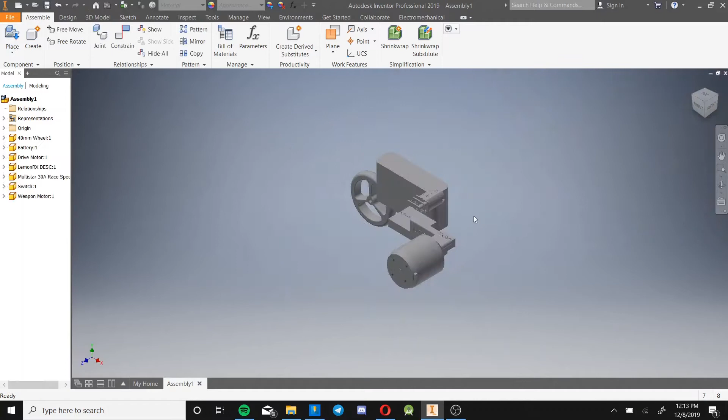Okay, so now that our standard components are placed, we can change our view to shaded with edges. Now, like I said before, you need to ground something, so I choose the battery.

And so here we can start putting in all of our parts, because this isn't all of them. We need 2 drive motors, we need 2 wheels, okay? So now let's lay things out very roughly.

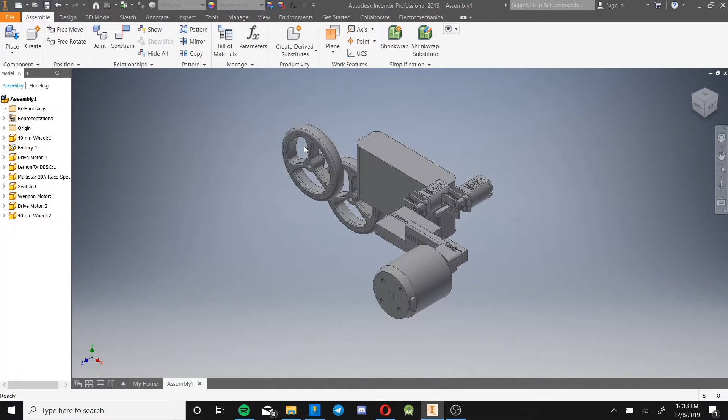And so if you notice, I can drag this around. Say I want it in the corner of that battery. Well, if I actually pan around, it's not in that corner of that battery. So that shows us that we need to do it on the planes. So if I want to make it in the corner of the battery, I have to do it from 2 views rather than from the 3D view. And so if I look, now it's actually in the corner of the battery.

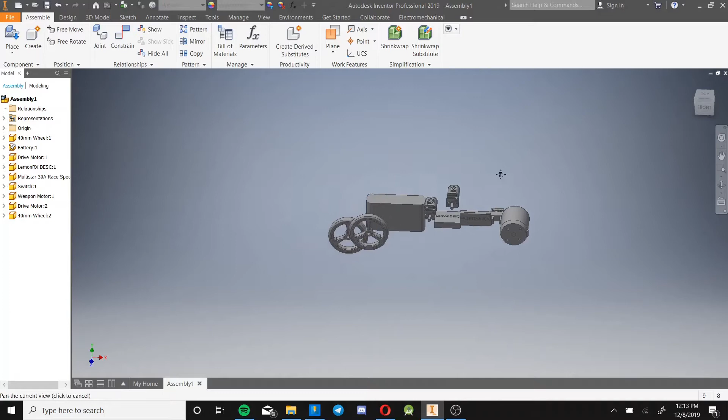So what we want to do is rotate things around. I just click this free rotate button up here, and I'm just going to kind of very roughly orient things. This just makes it easier to apply constraints.

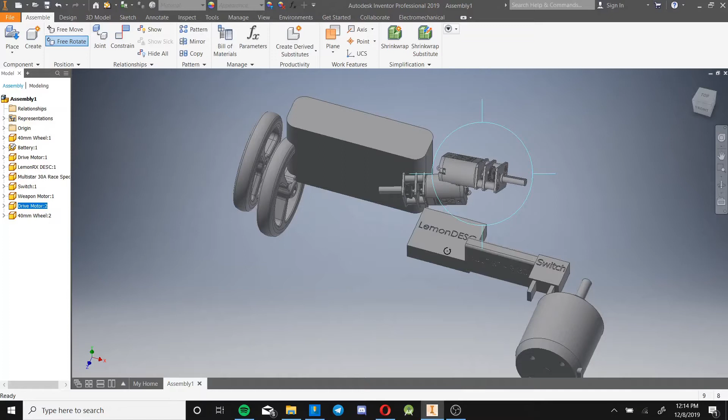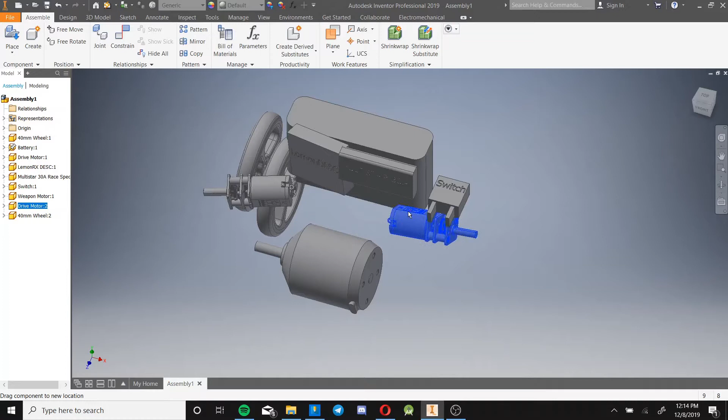And the orientation of everything that I chose here is just kind of going from wanting to package things as tightly as I can. So I want to make these electronics touch up right against the battery. I want to put the switch right in the corner there. I'm going to make the motors as close to those electronics as possible, so it's as tight and compact as can be in order to save space.

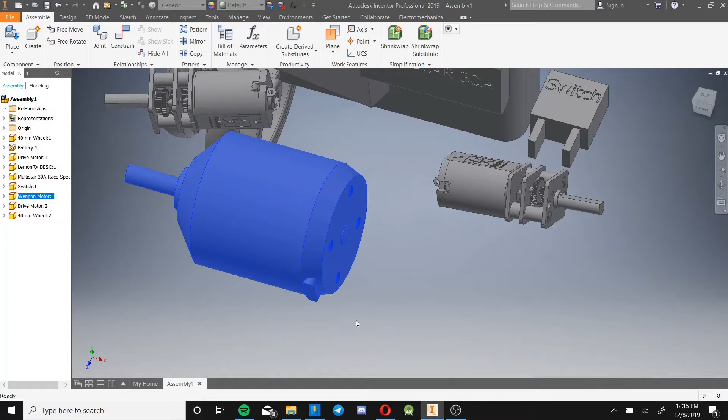And I know that I'm making a vertical spinner, so the weapon motor needs to be horizontal. Another thing to note is the wires here. See, right now they're pointing outwards, and so if we were to attach it like this, the wires would have to go out and then route back in. It's kind of annoying, so I'm just going to rotate this around as best as I can to get the wires towards the inside. And so now what we can do is lay things out more precisely.

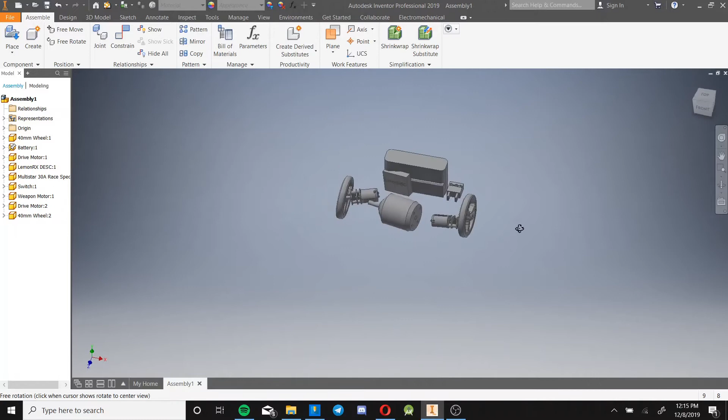Okay, that's pretty rough, but that's what our robot is going to be laid out like. So let's start applying constraints while still giving it some freedom to move.

So for example, these weapon motors or drive motors and the wheels, I know that it has to be on the same shaft, so I can do that with a mate constraint.

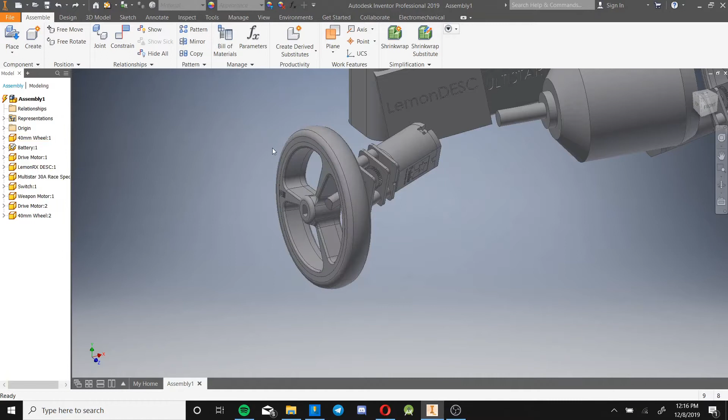If you ever have a wrong constraint, just undo it, or say you had a wrong constraint that you did previously before you did other constraints. What you can do is select the piece that you know to have the wrong constraint on, come over here, select the constraint, and delete it. So now it's free to move again and free to rotate. So let's continue.

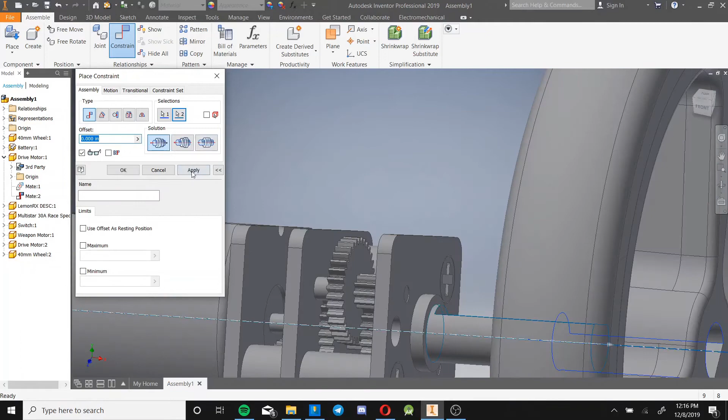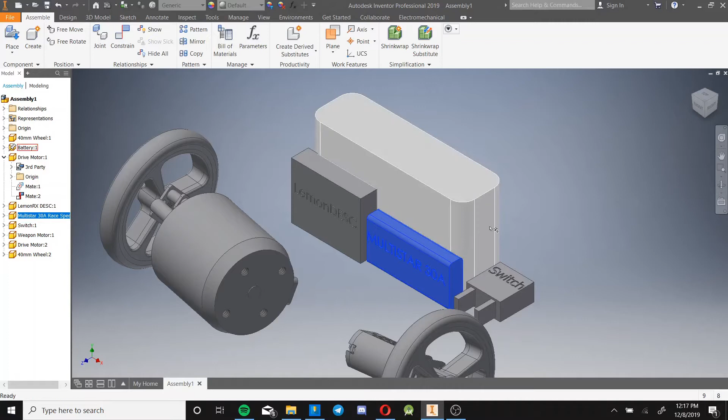Okay, let's take care of the electronics now and just kind of bunch them together. Okay, so this here is what we want eventually. We want things to be really tight, compact, not able to move at all, fully constrained. So let's do that for the rest of the components here.

And for the wheels, we know they should be in line with each other, right? And they should also be, the axes should be parallel. Oops, I don't know what happened there. The axes should be parallel to the battery itself.

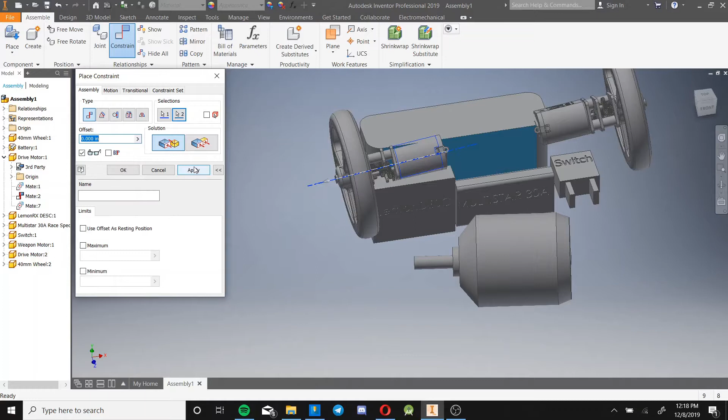And we can do an angle constraint on that, and just kind of play around with the angles and hopefully it snaps together. You might have to try something different, but I'm just going to go from there.

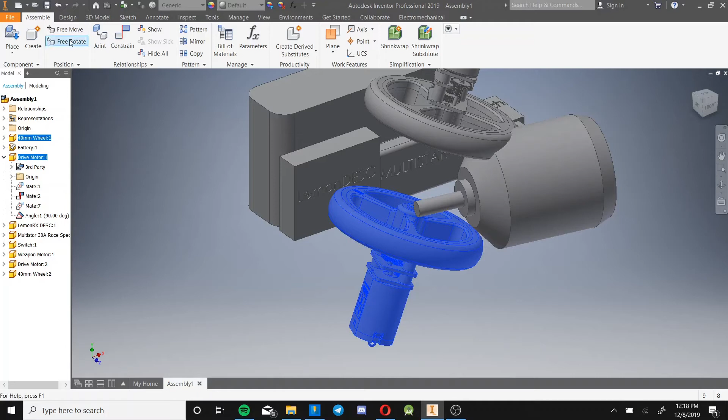And if you ever, so now they're really weirdly oriented. If you ever want to rotate things while it's still constrained, you can do that, and you can select multiple items to rotate at once, right? And then all you have to do after that is go up here to this orange button and hit update, and it re-snaps the constraints together, right?

So let's continue with some constraints.

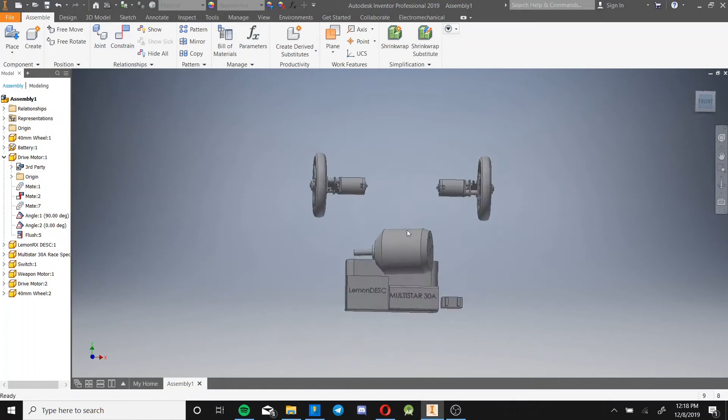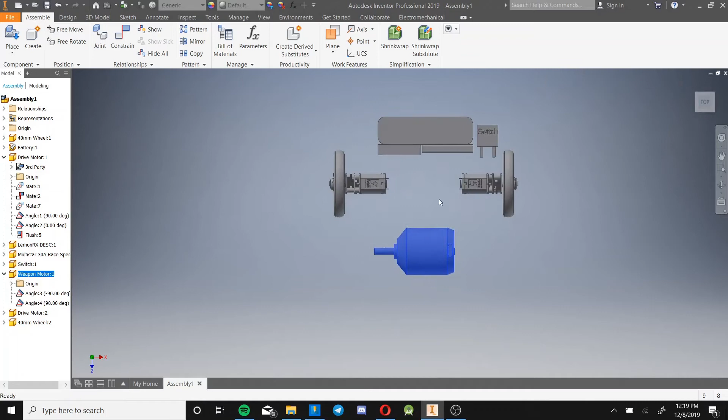Okay, so now that we're pretty close to having things fully constrained, let's add a few more parts in here. Well, one more part, which is the weapon itself. You notice I made this big cavity, but I'm not sure exactly how far in to make it because I don't have the weapon yet. So let's go ahead and make the weapon.

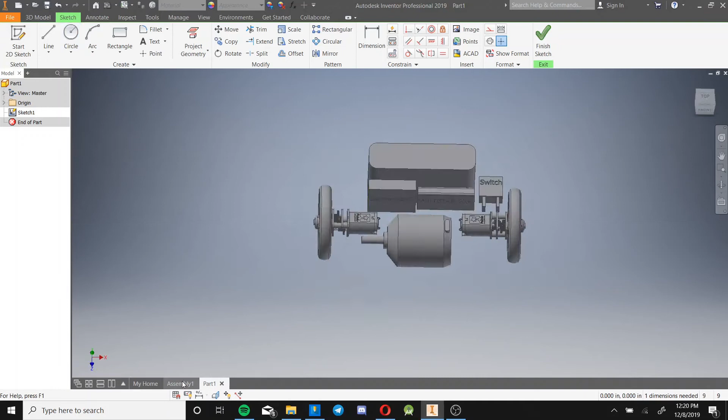Okay, so I'm in a new sketch in the weapon file here, and I'm just going to put the hole for the press fit, because if you know what outrunners are, you know this is a motor, but the shaft isn't the only thing that spins. This entire outer shell spins with the shaft. That's why it's called an outrunner.

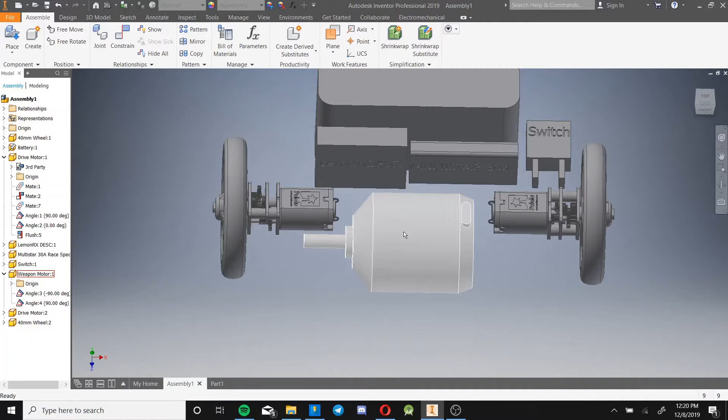So what we can do with that is press fit a weapon onto this outer shell here, and it'll spin with it. We don't have to do any kind of shaft collars or anything like that. We just literally clamp this on, basically.

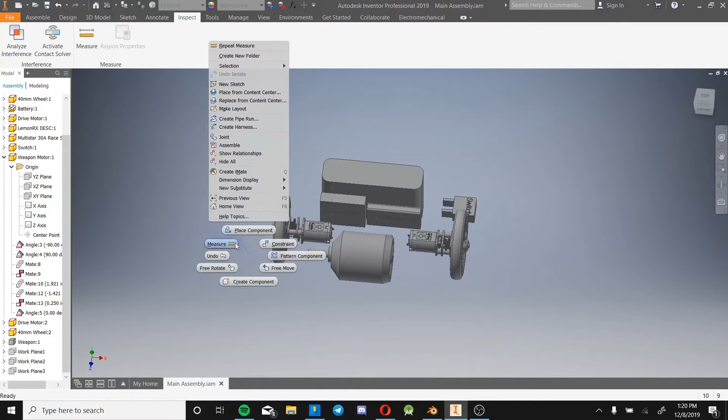And so to get that dimension, we're going to use what's called the measure tool. The easiest, or proper, way to get to that tool is to go to the inspect tab and use the measure button. Or what you can do, and I prefer this, is right click and mouse over to measure. Or there's a shortcut where if you right click and hold and drag over to where you know that option to be, it'll select it.

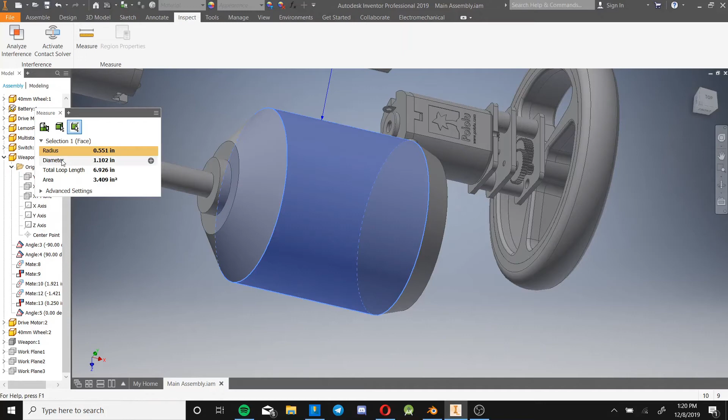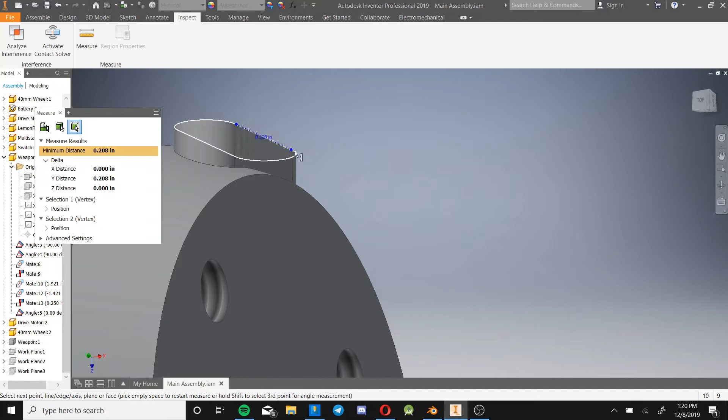This measure tool is pretty handy because you can measure, say you want the radius or diameter of this cylinder, you can click it and it'll give you the radius, diameter, total loop length, area, everything you need. If you want a distance, you can do the distance from this face to this face, or the outer distance of this face, or the outer diameter of this circle. Or if you have points, you can go from point to point, or from center of a hole to center of a hole, and it'll give you that distance.

It's pretty useful. So let's get the diameter dimension of this cylinder, and let's go use it. That's going to be the diameter dimension of our hole.

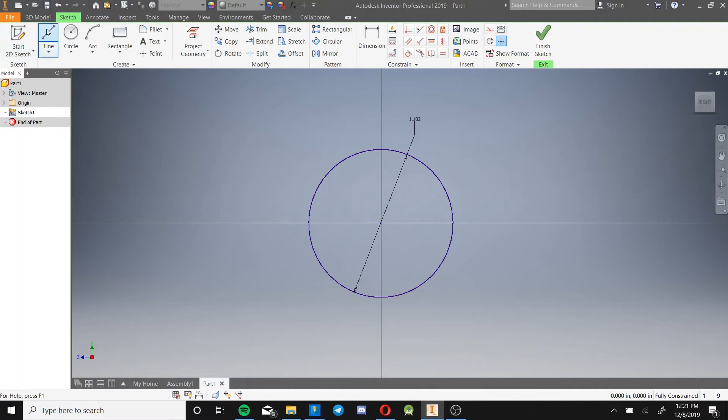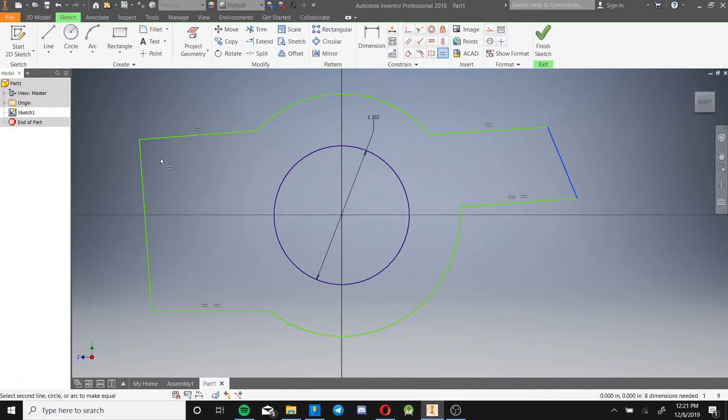And I kind of have a rough idea of what I want the weapon to look like, so I'm going to sketch that out. Okay, so this is roughly what it's going to look like. Let's add some constraints. I want it to be symmetric across both sides, so I'm going to make everything kind of equal. Okay, so now it's shaped the way we want.

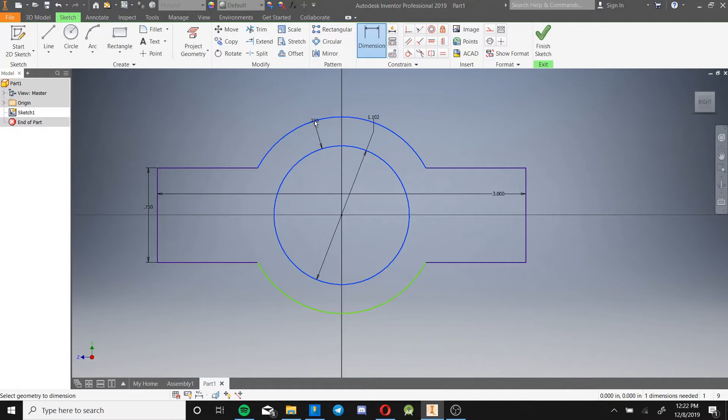Now we just need to put the dimensions in. So I'm going to make it 3 inches long, and I'm going to make this section here 3/4 of an inch tall. And I'm going to make the gap between the weapon motor and the outer shell about 0.3 or something like that. That looks pretty good to me, and it's all blue, it's all constrained.

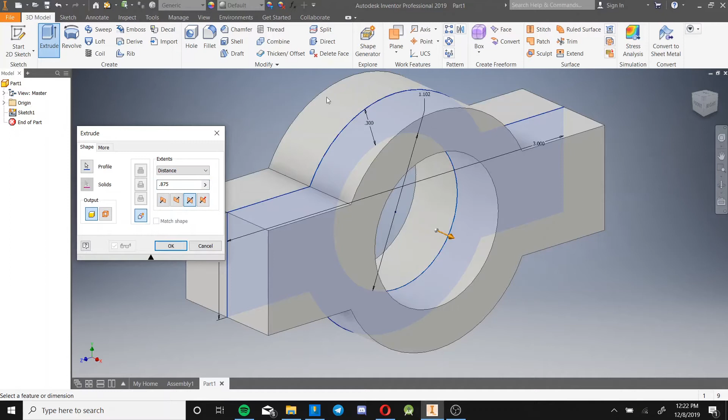So now what we can do is extrude that. Another tip here is there's a symmetric extrude. So if I want to extrude this 0.875, I can make this a symmetric extrude, and it'll extrude evenly on both sides to make the total extrusion 0.875. This is very nice because now we have a plane that goes right through the center, and this will be useful when constraining this in the assembly.

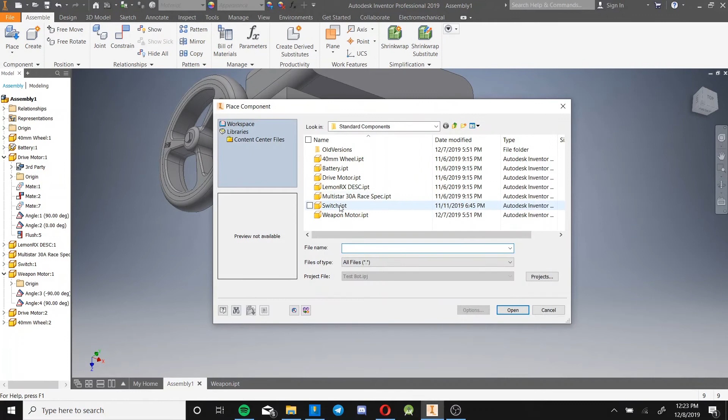So let's save this, and let's place it in. Add some constraints.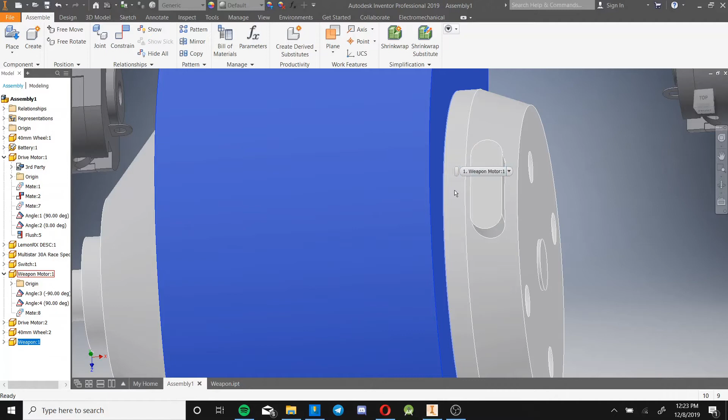Another constraint to note is that we can't have this too far down, because the edge where the outrunner shell stops is right where my cursor is. If we make it too far down, it'll rub against something static and create a lot of friction, and our weapon might not even spin. So I'm just going to constrain it to this top edge here to give it more than enough space.

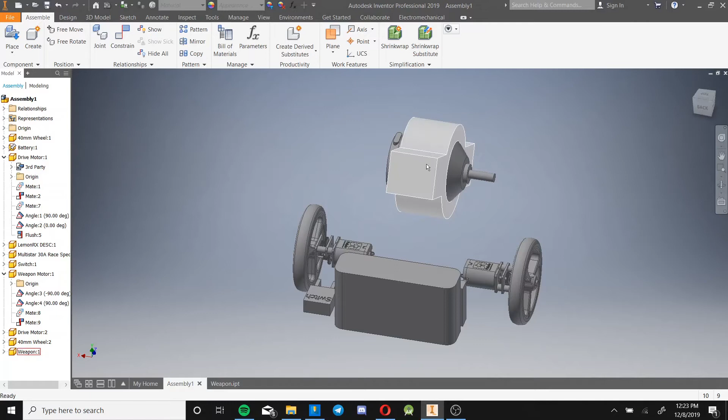Now everything is looking in place, so let's add some more constraints. I want to make the origin plane of our weapon motor be in line with the very center of this battery. So I need to make a plane at the very center of the battery. Actually, let's check the origin planes. No, there's no plane through the very center of the battery, so we need to make that.

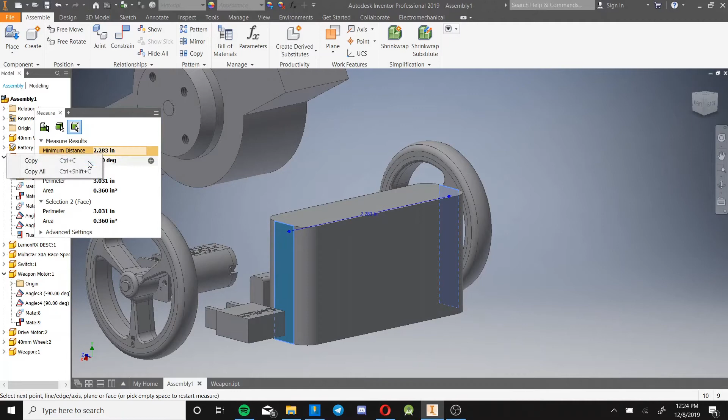I'm going to do that with an offset plane. If we get the total distance of the battery, copy that, and make an offset plane from one of these faces of negative that distance divided by 2, it'll be right in the center. So now we can take this weapon, make the origin plane visible that we want to work with,

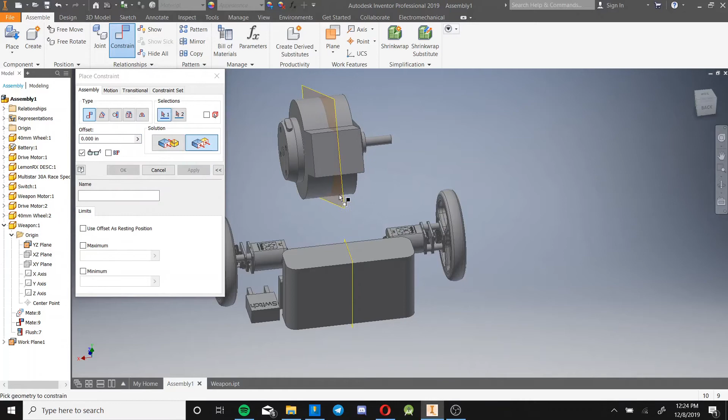and we can constrain those two planes together. Okay, so now it'll always move in line with that. See, I can't move it side to side. Let's hide those planes because they are kind of annoying.

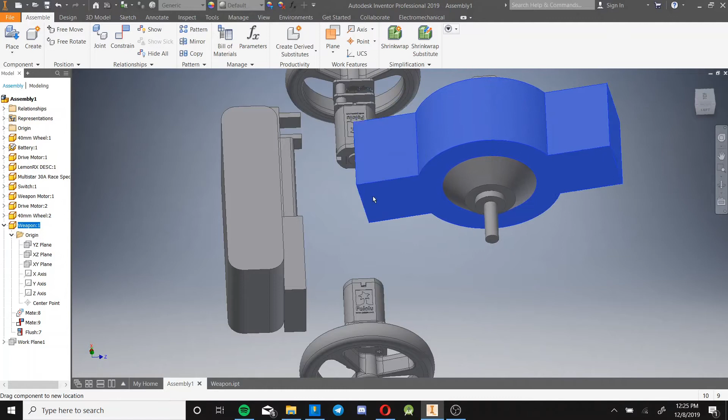Let's do some more constraints. So when this spins, there's going to be a circle, an area of effect that it will have, and we don't want any of our parts to be in that area of effect. That area of effect is defined by the largest distance across any two points on our weapon, and I know that is from this corner to this corner.

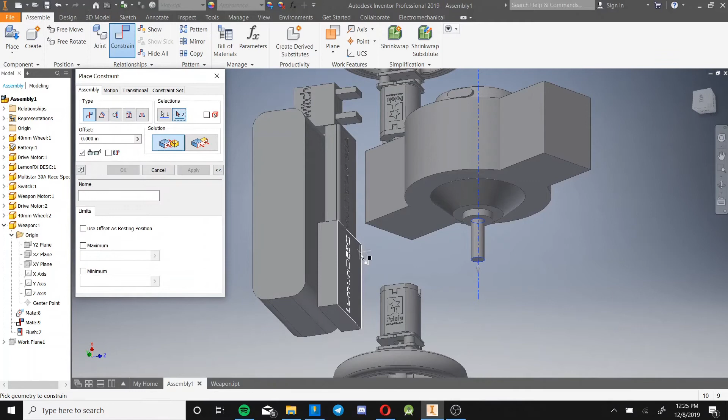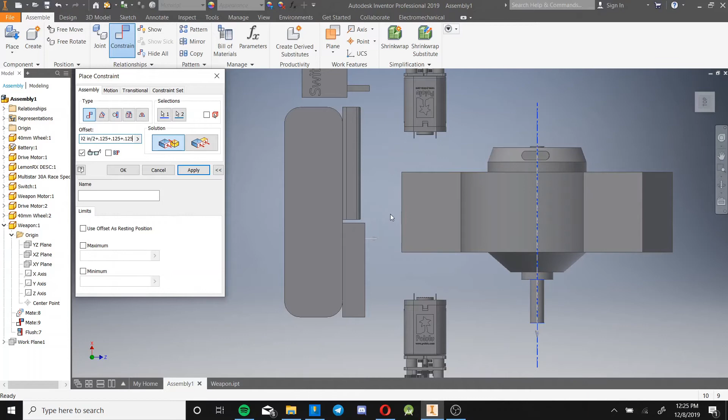So this distance is the diameter of the circle area of effect. What we can do then is give the electronics at least that area of effect clearance. I'm going to take into account the thickness of the wall, which is going to be 0.125, some clearance for the wires, and some more clearance on the outer edge for tolerance. That's a dimension that we want to have there.

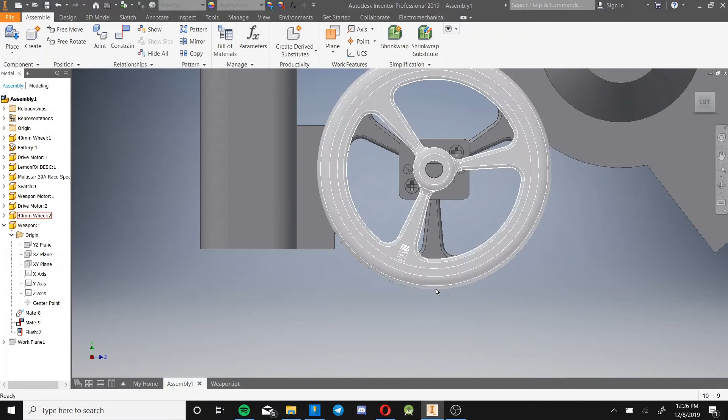Okay, so now we can't move it back and forth, we can only move it up and down. So now we're going to get into ground planes. A ground plane is literally exactly what it sounds like: it's the plane where the ground is, which is always going to be at the bottom of these wheels. So we need to put a plane at the bottom of the wheels.

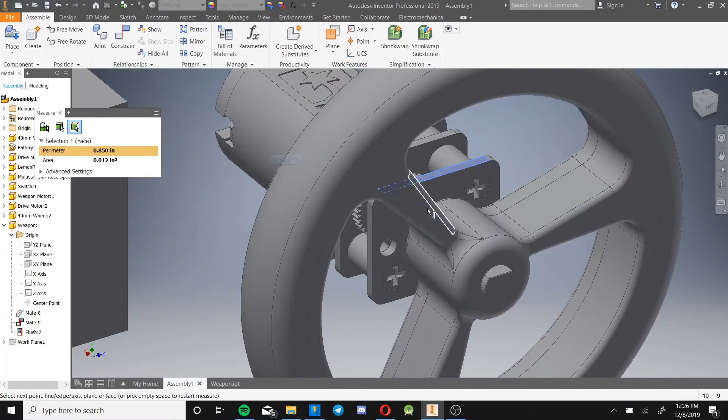To do that is kind of tricky, you have to play around with the planes. What I'm going to do is make one at the center of this motor, and then make an offset plane from there to the bottom of the wheel. So let's use the same technique we did with the battery: get the total distance that we want it to be in the middle of, copy that, and I think we can click this now.

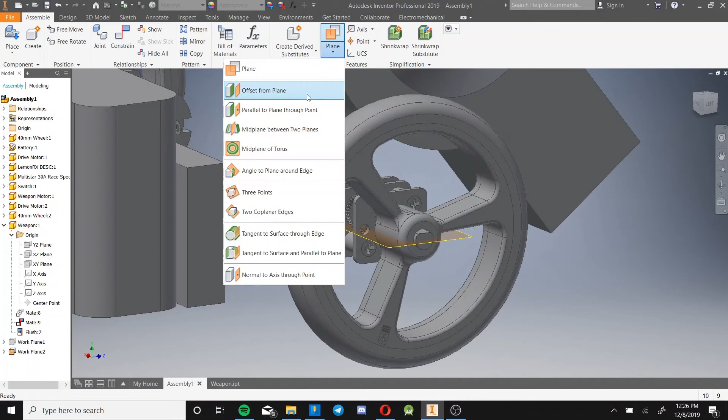Okay, so let's offset from here. Oops, let's try that again—offset from here, negative that distance divided by 2. So now we have a plane in the very center of the motor and the very center of the wheel. We can do an offset plane from that plane, and I know this wheel is 40 millimeters in diameter, so I need to go negative 20 millimeters. Hit OK, and now we have a plane at the very bottom of our wheel.

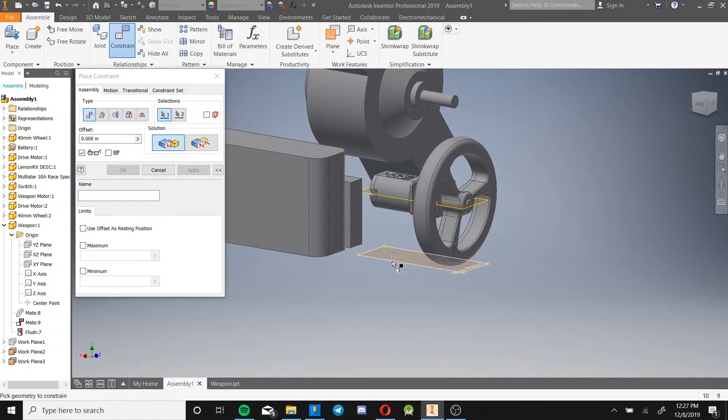That's our ground plane, so now we can reference things from that plane. Like, we want the clearance of the robot itself to be about 0.2 inches. This battery I know is going to be on top of the base plate, so if we can dimension off of that—the base plate is going to be 1/8 of an inch thick, and then we also want 0.2 inches of clearance.

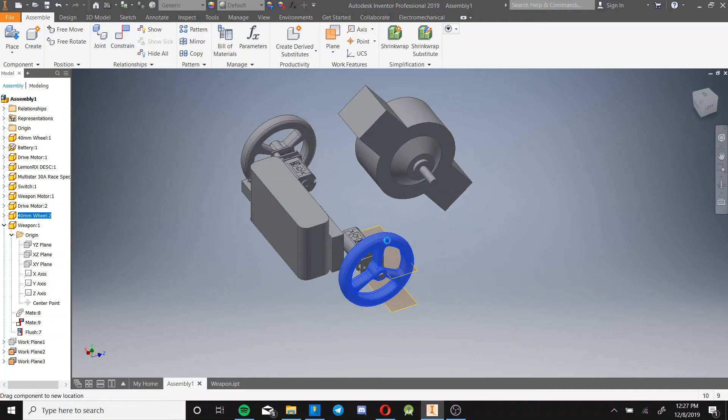Okay, so we're getting some more dimensions in here, things are starting to look better. What we can also do is dimension the height constraint of the weapon motor, and I want that to be—oh shoot, I need to get the area of effect again.

And so the measure tool again, you just right click, move over to the tool you want, and there's the measure tool. Copy that.

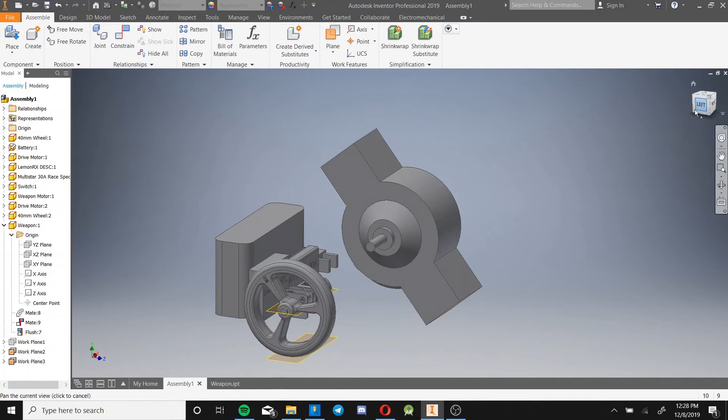So I want the bottom of this weapon to be at the bottom of the base plate. We just need to add, or subtract, 0.125 inches for the thickness of the base plate.

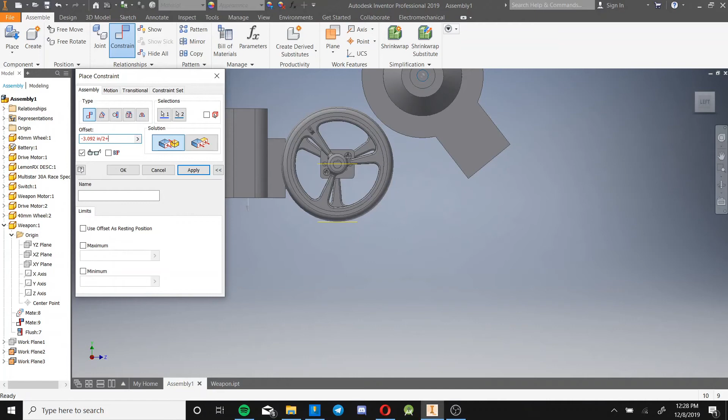Okay, so now this is fully constrained right here. The only things that aren't constrained are the switch and the distance, these two constraints for the wheels. So let's do the wheel constraints.

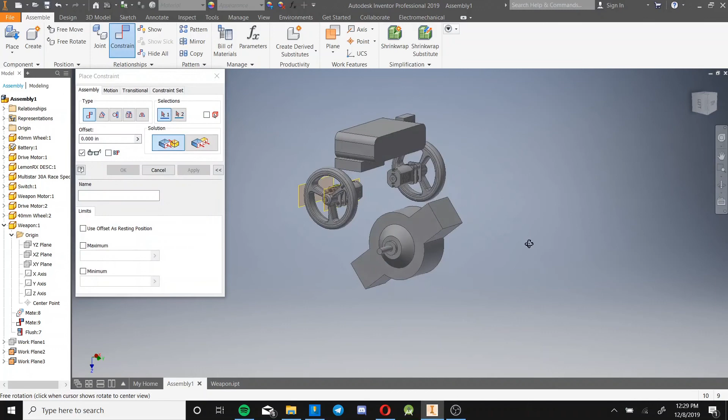If we look at our example bot, I know that there's kind of a wall right here, let's say. Alright, so let me sketch this out for you guys. So there's a wall that's going to be right here, right? And that's going to have bolts that mount to the weapon motor. So we need to add some clearance in this little section here of about 1/8 of an inch. That's a terrible 1/8 of an inch, but you get what I'm saying.

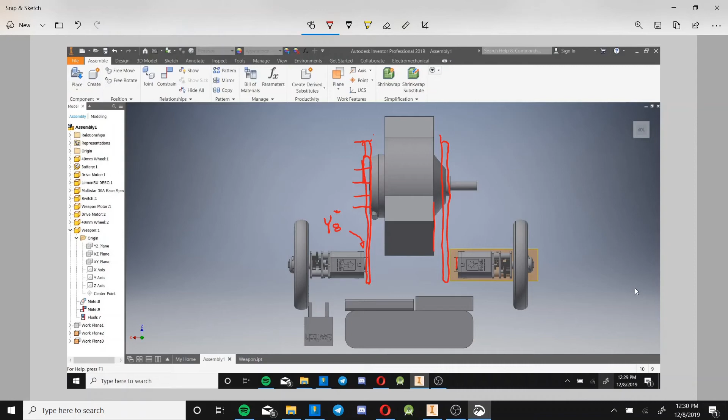So that means we're going to reference or do a mate constraint from the drive motor to the weapon motor. That's going to be the 1/8 inch thickness, that is the wall here, an 1/8 inch thickness for clearance, and then that'll be our constraint. And on the other side, we're going to reference it off of the weapon itself, right? So there's going to be a wall kind of right here. These walls are terrible, you get what I'm saying? So there's going to be a dimension or a constraint from this point, this face to this face. That's going to be an 1/8 inch tolerance clearance, 1/8 inch thickness of the wall, and 1/8 inch wire clearance.

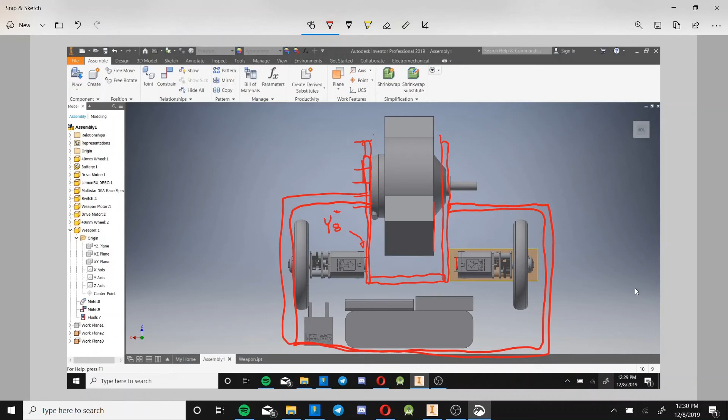And then what we can do is draw in the rest of our bot, which is going to kind of look like this, except, here, hold on, give me a second. We're going to make it tight to the electronics. I forgot. So we're going to come in like that, you get what I'm saying. So that's going to be the outline of our bot, and we're going to have these walls that are jutting out, which are going to protect the weapon motor and also mount the weapon motor. So let's go do that.

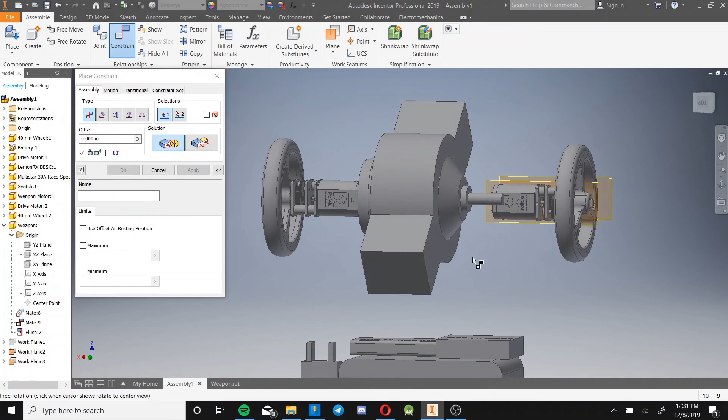So we want the mate constraint. That's going to be an 1/8 inch thickness for the wall, plus an 1/8 inch thickness for the wires, or clearance for the wires. And for this side, 1/8 inch tolerance, 1/8 inch wall thickness, 1/8 inch wire clearance.

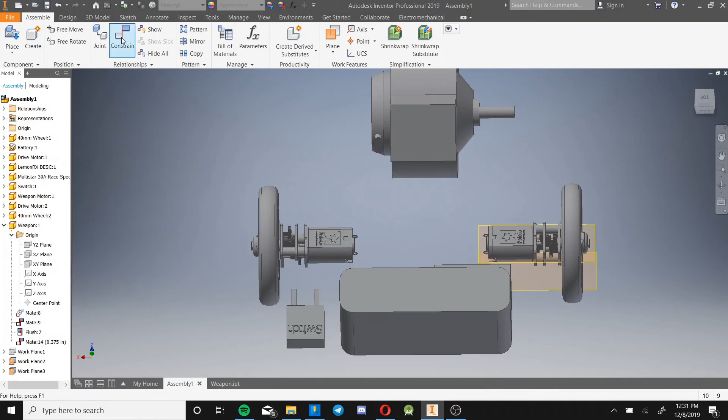Excellent, so now there's only one more constraint for these, and I just want this to be kind of as far back as I can without getting to be annoying. So I'm just going to say there, and I'm going to snap it to a dimension. So say this dimension is 1.38. What I'm going to do is create that dimension, but make it 1.38 of an offset. Or a more neat dimension would be a better number. So 1.25, 1 1/4. Actually, I don't want that, I want to make it a little further out. So I'm going to add 1/8.

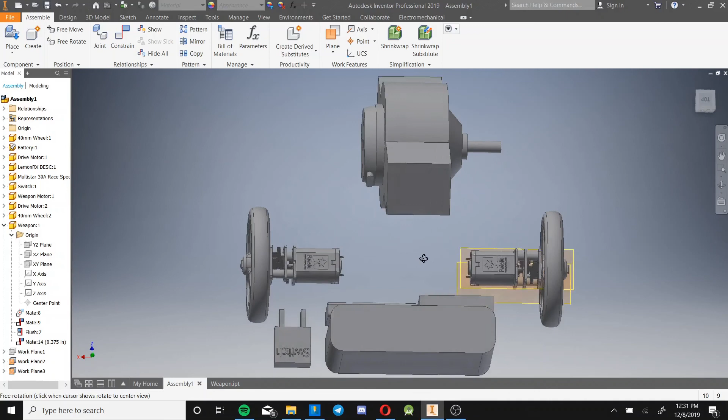And with the switch here, what we can do is just add a couple random constraints here. Sure.

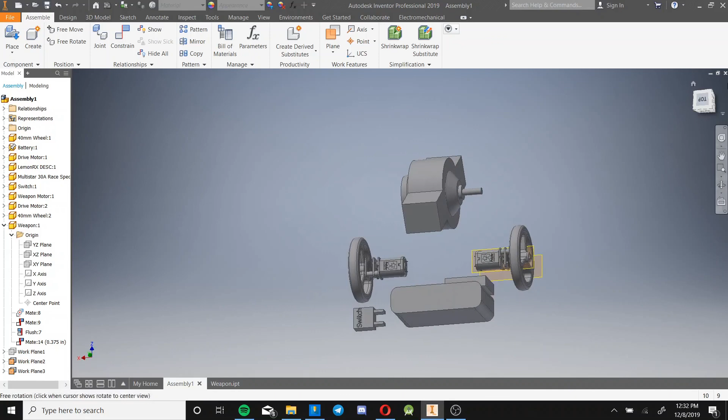And I realized I want these drive motors to be out just a little more, so I know the constraint is on this drive motor. And I'm going to edit the distance, and I'm going to make it -1.5 instead. And I'm going to call that good.

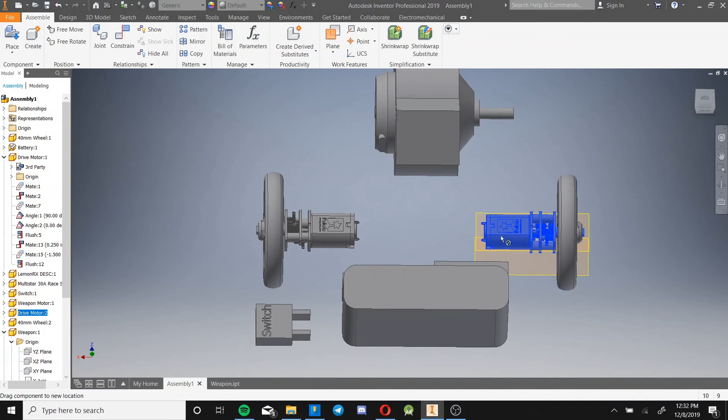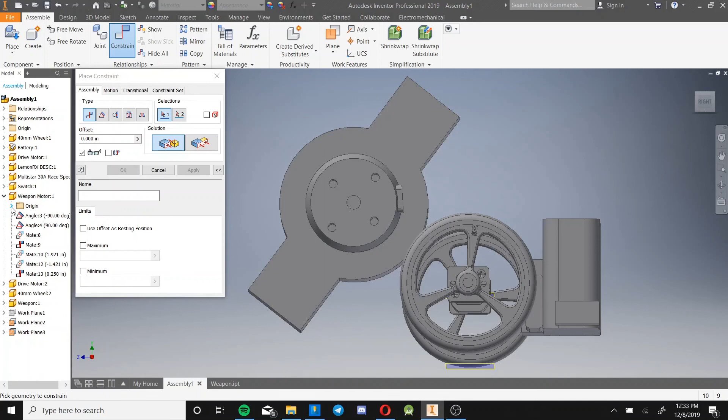So the only thing that's not constrained is the drive weapon motor rotation, right? And I know I want the wires here to be kind of parallel to the ground plane here. So it's going to look like that. So let's add a constraint for the weapon motor, just pulling from an origin plane. That just makes it easier, and I'm going to make that parallel, so 0 degrees offset from, or I could even do it from the ground plane.

Excellent. Okay, everything's constrained. Let's go ahead and build our shell around it in the next video, after we save this.